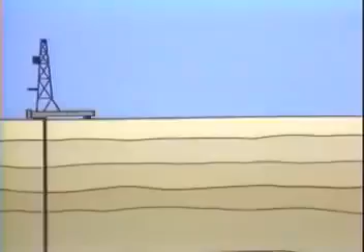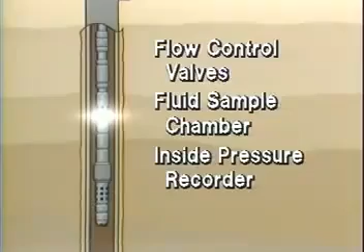In their simplest form, the drill stem test tools run on either drill pipe or tubing, and consist of flow control valves, a fluid sample chamber, an inside pressure recorder, one or more packers to isolate the zone being tested, a perforated anchor for fluid to enter the tool string, a temperature recorder, and a pressure recorder.

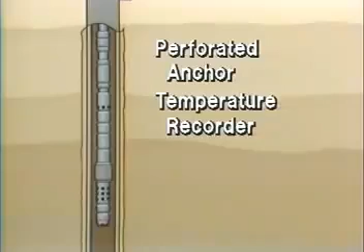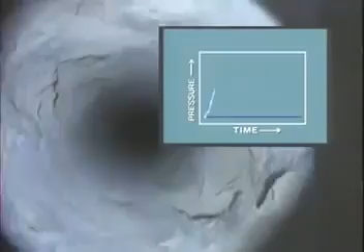As the tools are run into the hole, the increasing hydrostatic pressure of the mud column is recorded by the pressure gauge. The tools are run into the hole with an empty drill pipe or tubing, except in those cases where a carefully designed water, diesel, or nitrogen cushion is required.

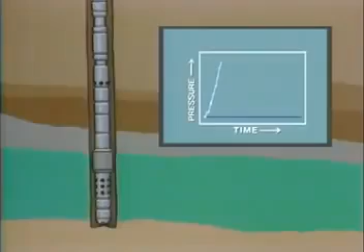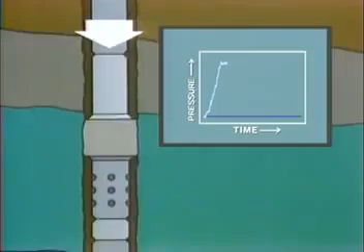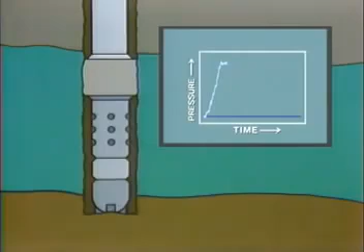When the tools reach the depth of the formation to be tested, the packer is set against the walls of the hole or casing, thereby isolating the pressure of the mud column from the pressure in the test zone. Pressure is measured at the very bottom of the tool string and also within the tool string itself, and so the gauge now will record the pressure imposed by the hydrostatic head and any squeeze pressure developed when setting the packer. A flow valve is then opened.

And the formation fluids are free to flow into the low-pressure drill pipe. As fluids fill the drill pipe, the pressure increases. This is the initial flow, or pre-flow period, and is usually of short duration, typically 5 to 10 minutes. Its purpose is to relieve any buildup in pressure that may have occurred in setting the packer or packers, or any supercharging of the reservoir due to mud filtrate invasion.

A control valve is then closed. And because fluids can no longer flow into the drill pipe, the pressure recorders begin to feel the formation pressure, and the recorded pressure normally approaches the original formation pressure. This is the initial shut-in pressure. This shut-in period typically lasts for 30 to 60 minutes.

The control valve is then opened once again for the second, more important flow period. The test will last for 60 to 180 minutes for an open hole test and up to 8 to 10 hours for a cased hole test.

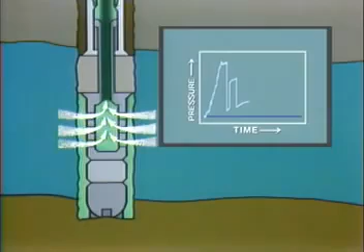At the end of this second and final flow period, a fluid sample is collected and isolated in the sample chamber. Samples are also collected at the surface for wells that flow to the surface. This final flow period is followed by a final shut-in period, which should last for about twice as long as the final flow period. This gives a value for the final shut-in pressure.

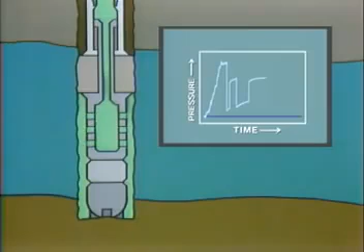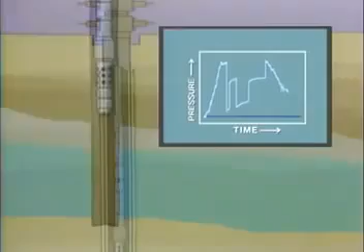Any produced hydrocarbons are then reverse circulated out of the test string. The packer is carefully released and the tool pulled to the surface. Note that the hydrostatic pressure imposed by the mud column at the bottom of the drill stem, as soon as the packer is released, is reduced as the tool string is pulled out of the hole.

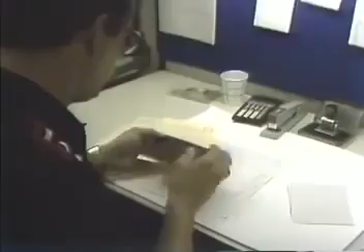At the surface, the pressure recording device is retrieved from the tool string, and the dynamic response of the test interval to the alternating pressure drawdown and buildup periods is analyzed. Of course, if the required information was not obtained, the test must be repeated.

To avoid this costly remedy, it is now possible to measure pressures at the surface while the test is being run. This provides immediate information on the quality of the test, an opportunity to analyze the data before the tool is retrieved, and the ability to terminate the test when sufficient data has been collected.